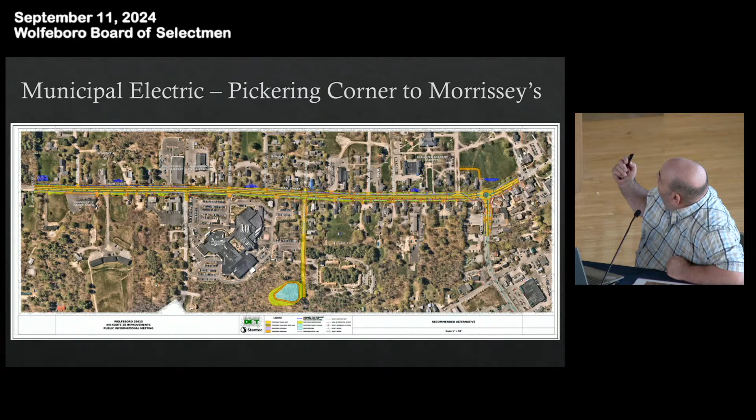Right now, we have an estimated cost of $1.4 million to do that work, and that does not consider the cost of other utilities. With that said, here is a gross overview of a presentation that Barry gave about 3 months ago. This lays out from Pickering Corner to Morrissey's, and then this second slide lays out from Morrissey's to McManus Road.

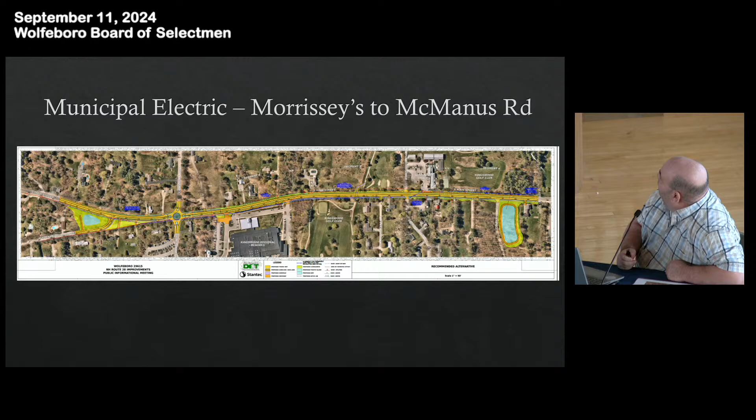With that said, Steve, could you transition this to Barry's presentation? Barry's going to go through a series of slides which will explain what municipal electric will have to do.

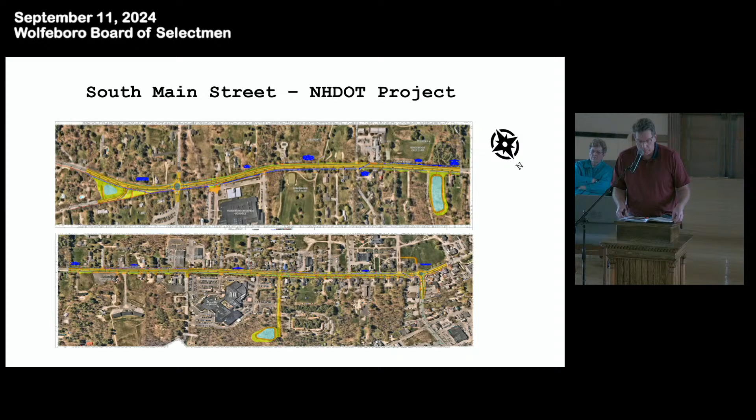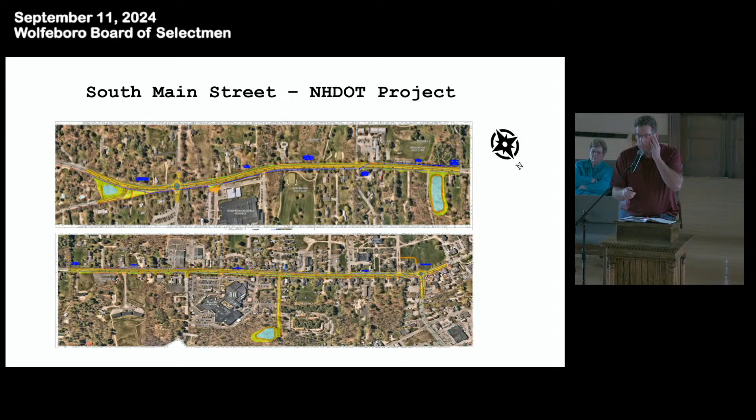I took the whole project and divvied it up into 11 sections. These sections all have similarities in the type of condition of relocation - are we in the right of way, or are we out of the right of way. So they have common relocation conditions, and that's how I divvied it up. I also started at Pleasant Valley and moved into town. I'm a left to right guy, so don't get confused with the numbering.

The first section would take us up just before the high school. You can generally see there's probably 5 or 6 poles - it's tough to make out, there's a lot going on. Our proposed relocated pole line shows up in blue, which would be the lower line on the bulk of lines there. The red represents where we are now.

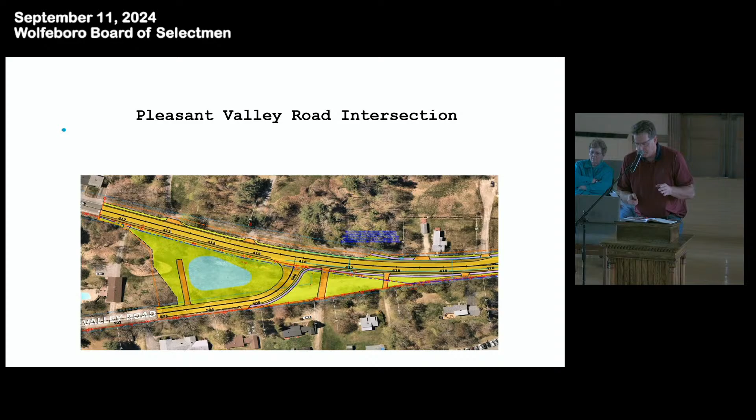So this is what that looks like on the street. We have to move back 10 feet behind the existing pole locations. That space is available - there is right-of-way to do that and keep us within the right-of-way during this section.

So section 1 down. It's not too bad - there's nothing really major there for trees in that little area. You see some bittersweet there clogging up one of our pole locations, but...

Relatively minor. Second section - understand these are just the original conceptual stuff with rotaries or whatever, but that's not defined at this point specifically. This just was our working model. This took us from that McManus-Canapatchee Road area up just beyond the second entrance/exit of the high school.

That area as well, if we can get 10 feet behind the existing pole line, we can stay out of DOT's construction work zone and stay within our right-of-way. You can see there's probably going to be a few trees there. There were a bunch of ashes taken down in front of the high school, which probably helped us a bit if we're going to go this route.

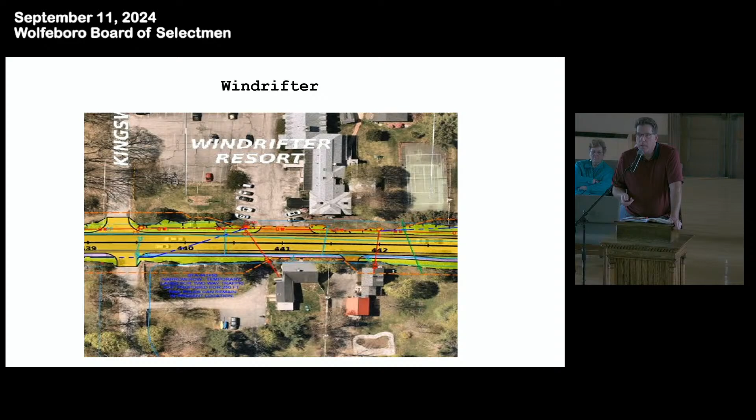The next area is in front of the Windrifter, just after where we cross. So we're going to cross right there, what you see in blue. We're going to terminate right here at this pole in the corner of their parking lot. In this case, that pole - I think there's 3 of them, 1, 2, 3 - fortunately, they can stay exactly where they are.

So there's nothing that needs to be relocated there. We feel we can stay out of their construction zone. We're in the right-of-way, and although we may have to replace the poles to go up in the air, we think we can stay there.

Understand when we relocate a pole line, we have to completely build the whole thing in a redundant manner because we have people that have power throughout that corridor. It also feeds much of our load to South Main Street. So we have to duplicate exactly what's there: poles, transformers, conductors. If not, you're talking about having extended outages when you transfer customers from the old circuit to the new one. So we're completely building a whole new circuit, wire, poles.

If we have to build them in place, typically we'd like to build them over what's there. We'll put in taller poles, get up above it, energize the top circuit, transfer if that's feasible. So that's why I really want to avoid the two moves, because then we have to have double the equipment. It has to be all there, all energized, all the services have to be ready.

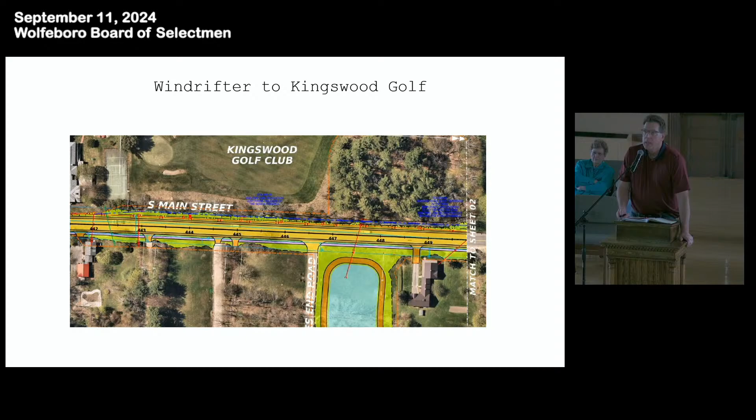So moving forward, the Windrifter down, it's actually Kingswood Golf's property, but that woods line that lies just beyond them, it's fairly heavily wooded, would be the next section.

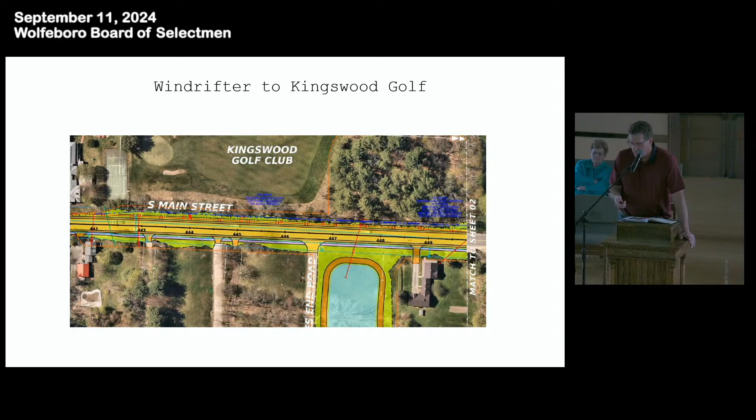Unfortunately, this section right here requires us to relocate the furthest back off the right-of-way. We have to end up back, and here's remnants of the stone wall. We have to actually be in back of that stone wall. So we are going to have to be on private property in this area.

And that's obviously going to take the vegetation back behind the stone wall as well. But there's no way to pull it off, get out of the construction zone with only one move, unless we can get easements to be in back of that stone wall there. So this is like the toughest area for us, I would say.

From there down, so this is where you come out of the woods line right here. We're just out of the right-of-way on this end of the field. I think this would be 295 South Main, that's 279, so we're right either side of Old Mill Drive. We're just out of the right-of-way here with our blue line, our proposed new line. We do transition back into the right-of-way, right in this area. We're right on the edge of it, and by the time we get down to here, we're fully back within the right-of-way.

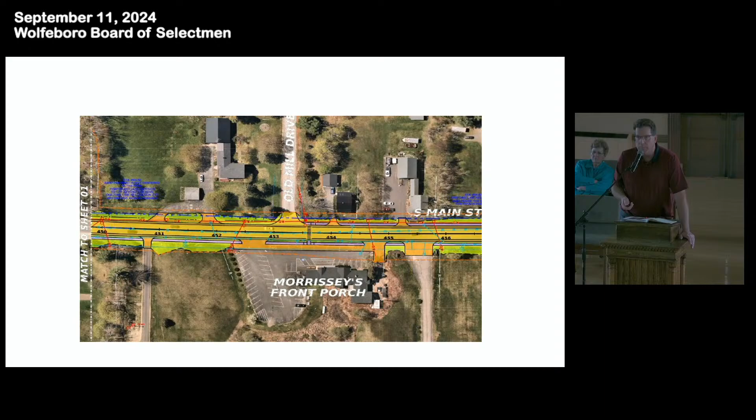This is what that area kind of looks like. You can see we've got some trees that are decorative trees in nature, some spruce. Although you can tell now by it being chopped up there to avoid the wood line, some of that appearance-wise is already depleted.

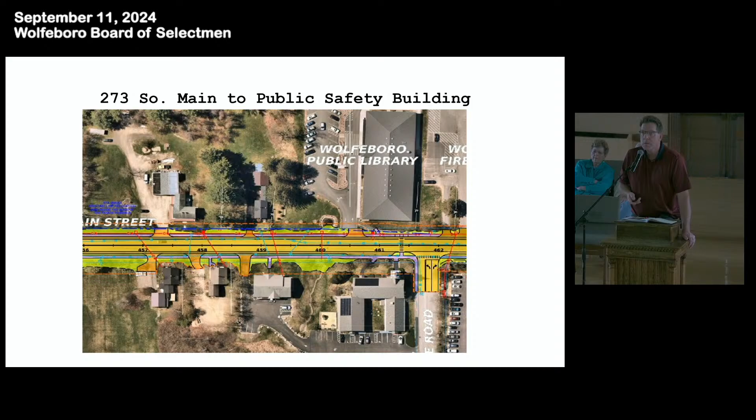Now we're at 273, just this side of Old Mill, and we're getting back down to the Public Safety Building. Again, we feel we can get relocated so that we're just inside the right-of-way, and we're going to have to be 8 to 10 feet behind the existing poles you see there, while still maintaining the idea that we're within the right-of-way.

Public Safety Building to Green Street. Maybe some good news here. We don't feel as though we have to actually relocate. There's probably 6 to 8 poles there.

The sidewalk is actually going to transition, the sidewalk's going to be in front of the poles in the final configuration versus to the rear. So we will be behind the sidewalk. I'm assuming, and it's tough to see at this juncture, but I'm assuming that means the whole road is going to take a bit of a shift to get a little more room on the west side of the road. So based on that, we feel we can stay right there.

And let me go back a bit. I'll show you the section that entails. So you don't see any of the blue lines until you get back down in here, I believe. So this whole strip down here can kind of stay right where it is.

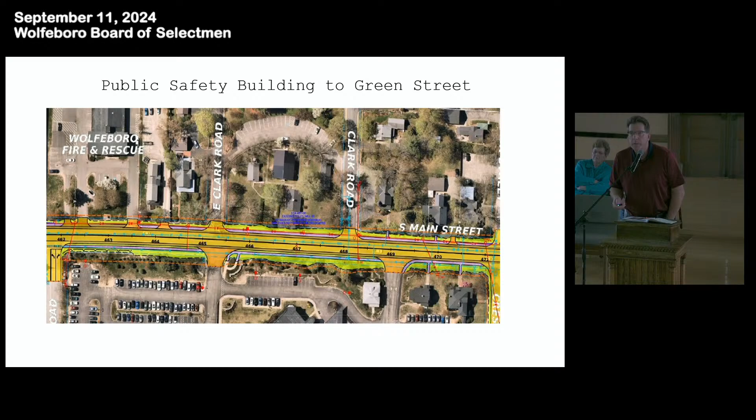Now, we presented this to DOT. This is our conceptual, but they haven't responded back saying, yeah, we like it, or no, we don't. So we don't really know their thoughts on this. All I can tell you is this is what we've showed to them where we think we can go, but the feedback's been limited at this juncture.

Next section would be from Green Street to Brewster's Anderson Hall, the old Catholic church. You can see the old line used to cross right there in front of Anderson Hall to the other side of the road. And because of the way that road is centered in the right-of-way, what we're proposing is not to cross there. We want to stay on the west side of South Main Street. We want to stay over here.

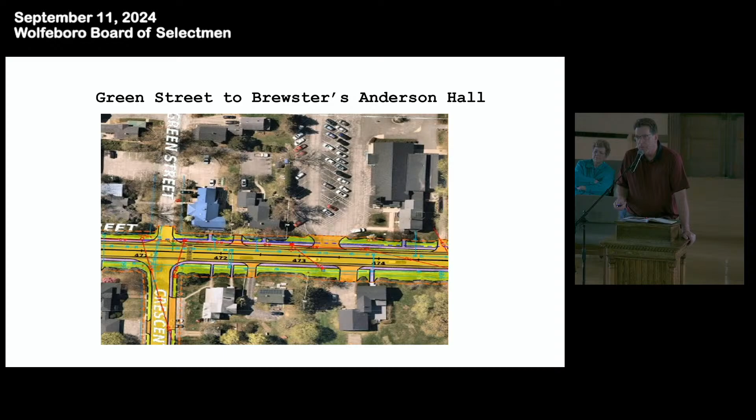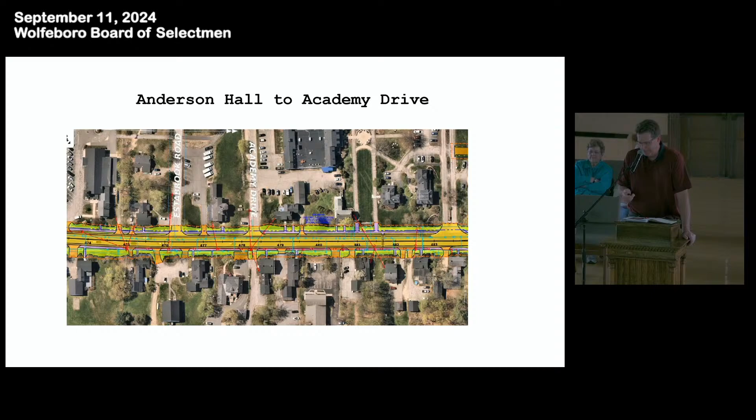That happens to be the crossing pole. It's a little tough to see what's going on over there in that photo, but let me... or did I go the wrong way? That perhaps was the case. Let's try that again.

Okay, there's the crossing. Yeah, that's where it crosses now from the west side to the east side. And our intent is to run the poles, continue them down this side.

We're going to be behind the sidewalk again, believe it or not. We have to go back a little bit. In the ultimate configuration, our poles will be behind the sidewalk.

We have a number of trees, Brewster trees in here that would be affected. The good thing about the west side of the road is the trees sit further off the roadway, the trunks further off than on this side. So the trimming on that side should be less noticeable, going up with 45-foot poles. Eventually the trees are going to grow and we'll have to cut them back, but at this juncture the tree lines generally sit 15 feet or so back off the pole, so that buys you a little room.

The next section is that area from Academy Drive back into Pickering Corner. Now you can see this is where we're proposing to cross the road. What we're going to do is cross to the existing pole at Three Sisters. This pole stays the same, everything beyond that stays the same. This is what's there now in red, and that's where we hope to stay.

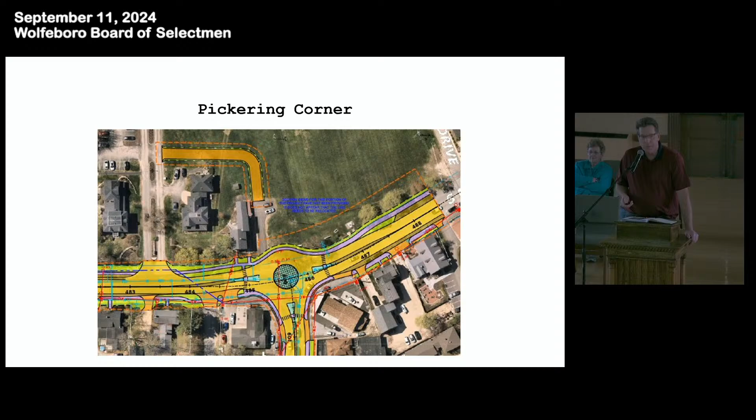And this is sort of what that looks like. We'd be crossing the road and attaching to that pole location from the other side of the road and jogging over.

So, issues—and that concludes my PowerPoint, end of the presentation. I think Jim's gone over some of the issues that are fairly well known. Tree trimming—I don't know how popular these tree trimming events are going to be.

There's been a DOT survey of the trees and conditions in those areas, for what it's worth. Everybody's got a different idea of what they consider heritage trees.

And so, easements where we have to be on private property—we don't need temporary easements, we need permanent easements. And we all know there can be some struggle with permanent easements.

And then the third thing I look at, and I think Jim mentioned it as well, we still have to have a lane closed while we're doing our work. So the whole idea that they want to maintain two-way traffic throughout the process—well, it doesn't apply to us. So you're going to be stuck with one-way traffic for months.